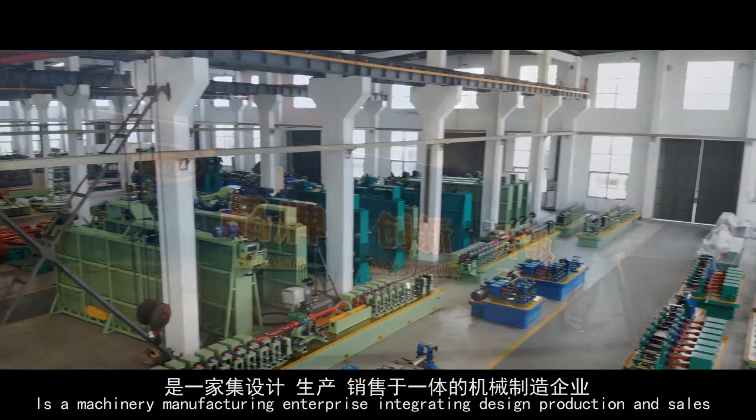Jiangsu Nanyang Machinery Manufacturing Company Limited, founded in 1971, is a machinery manufacturing enterprise integrating design, production, and sales. The company has been committed to the development and research of high-frequency welded pipe machine, stainless steel precision welded pipe machine, high-precision steel plastic, stainless steel composite welded pipe machine, and high-speed roller production lines of plastic profile. Nanyang has grown into a leading brand of precision welding equipment in China.

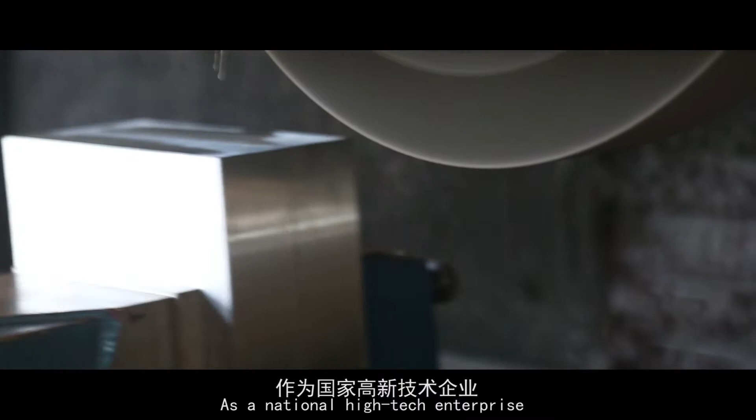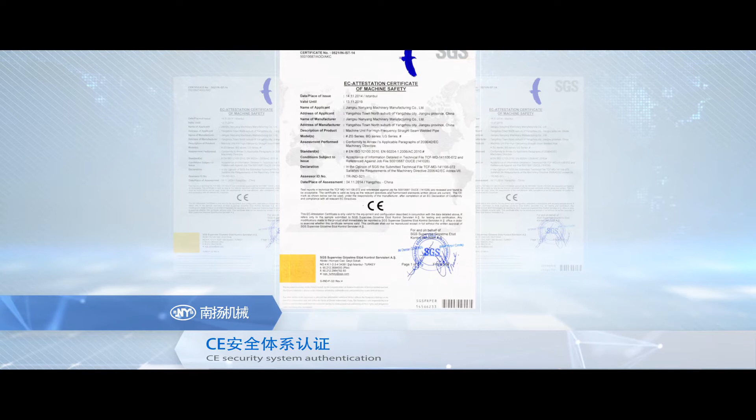As a national high-tech enterprise, the brand Nanyang has been appraised as a well-known trademark in Jiangsu province. The company has successfully passed the ISO 9001-2008 Quality System Certification and CE Safety System Certification, and has been appraised as AAA Contract Abiding and Trustworthy Enterprise and Quality Integrity AAA Enterprise for many years, and passed the National Measurement Management System certification.

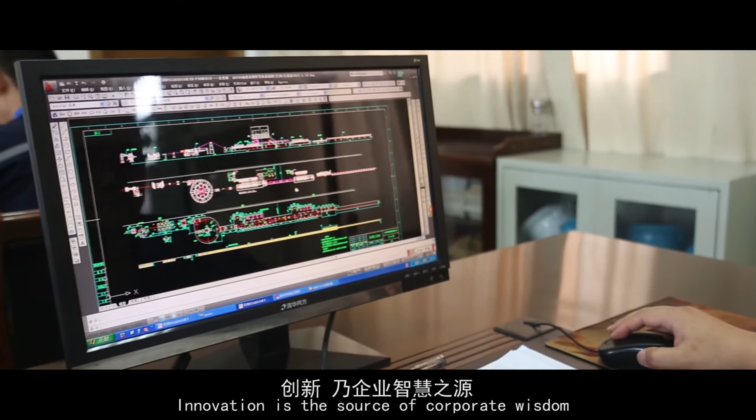This series of honors also reflects the remarkable journey of Nanyang people. Great wisdom, innovation. Innovation is the source of corporate wisdom. Nanyang has always been oriented by technological development and integrated innovative wisdom into the development of the enterprise.

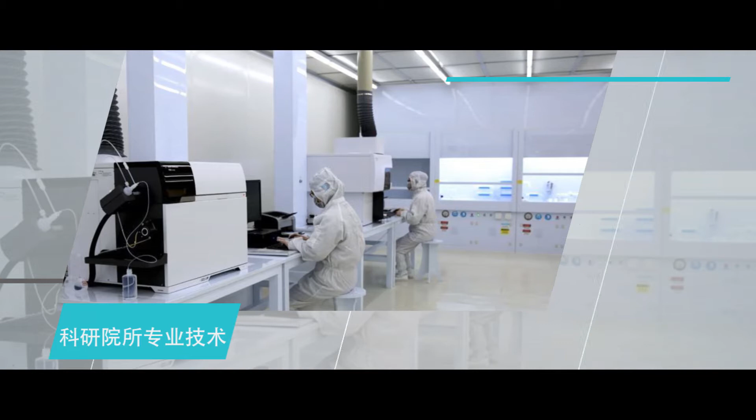In Nanyang, we not only have an expert team of high-level talents, but also have established the Precision CNC Roll Bending Forming Mechanical Engineering Technology Research Center of Jiangsu Province and the first-class Product Technology Design Center of China. We also have the professional technology platform support of many universities and research institutes in China, including Nanjing University of Science and Technology and Shenyang Ligong University.

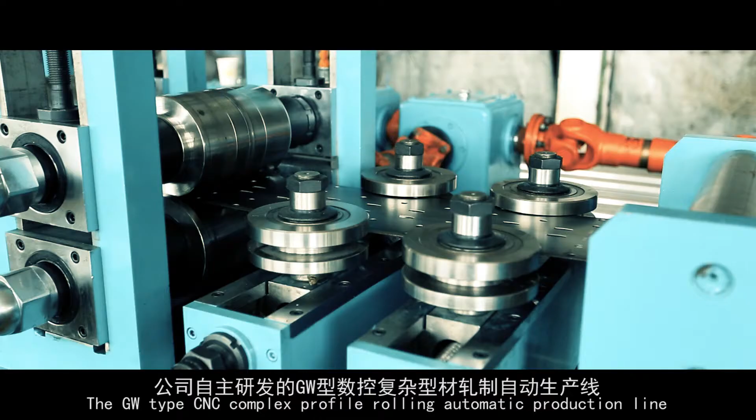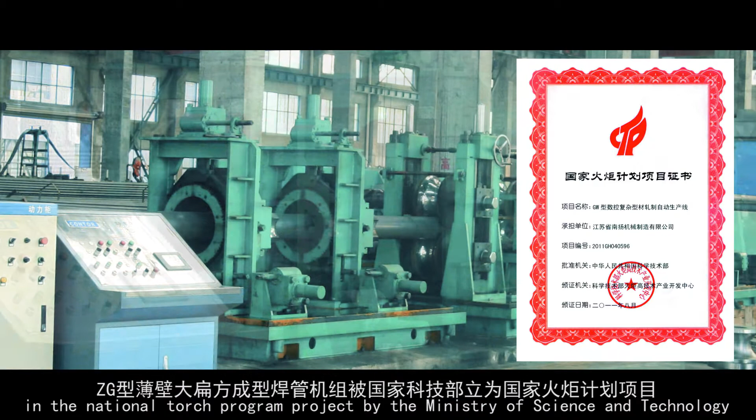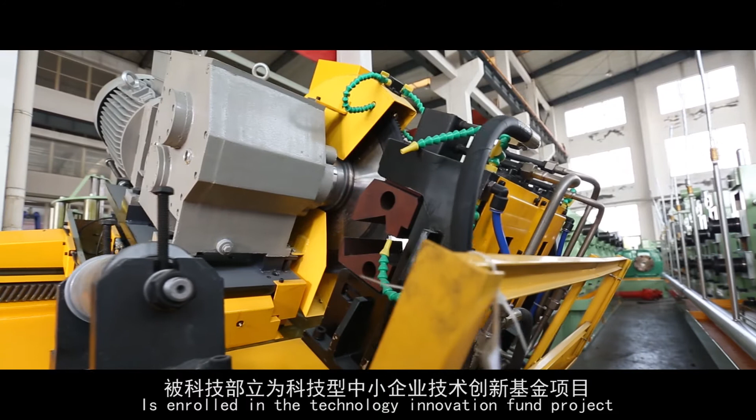The process of innovation is arduous, but the results are exciting. The GW type CNC complex profile rolling automatic production line and the ZG type thin wall rectangular welded pipe set, independently developed by the company, were enrolled in the National Torch Program project by the Ministry of Science and Technology, and the F20C NC Cold Cutting Flying Saw project is enrolled in the Technology Innovation Fund project by the Ministry of Science and Technology. Great responsibility.

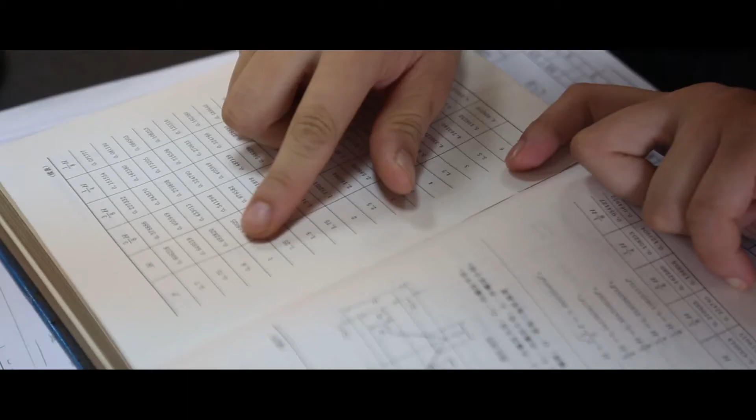Persistence on quality. Quality comes from the respect for details. Nanyang people inherit the craftsman's spirit of the big country and show the powerful production strength of the enterprise with the spirit of striving for perfection and the rigorous and pragmatic style.

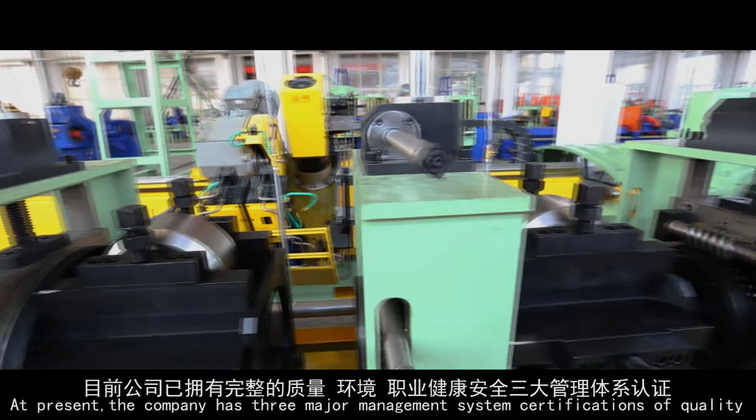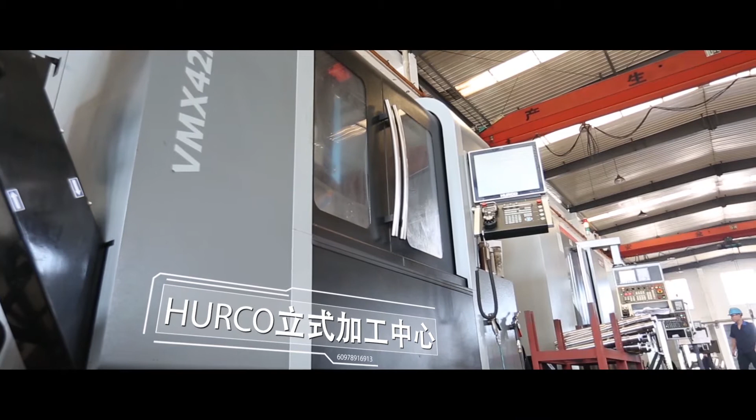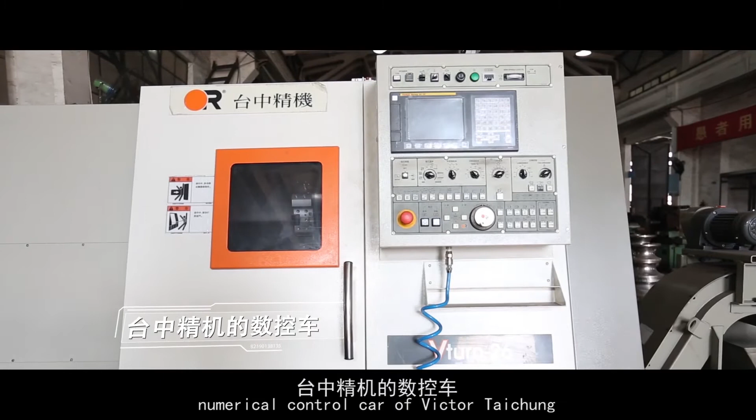At present, the company has 3 major management system certifications of quality, environment, and occupational health and safety, and has a large number of domestic and foreign advanced equipment and testing equipment such as HURCO Vertical Machining Center, Skoda Landing Boring and Milling Machine from Czech Republic, Large Gantry Machining Center of Taiwan Willy, Numerical Control Car of Victor Taichung, Trilinear Coordinates Measuring Instruments, etc., and achieves the annual output of more than 500 machines.

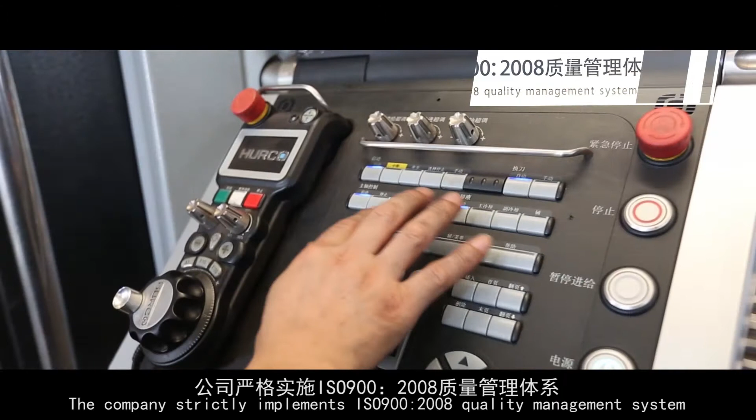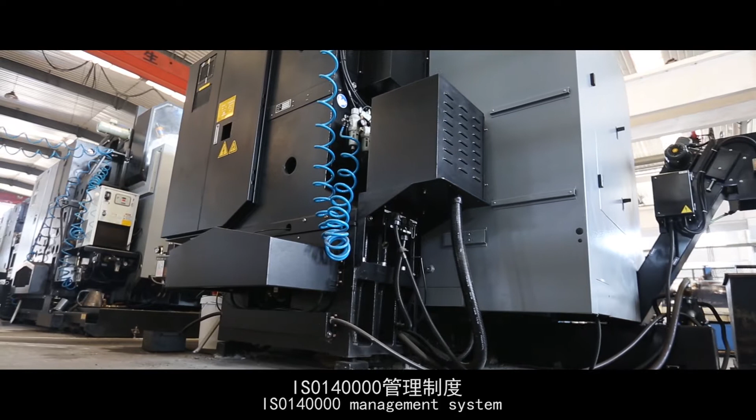Its perfect quality system, excellent and advanced equipment, and high-quality staff could greatly satisfy the customer's need. The company strictly implements ISO 9001-2008 Quality Management System, CE Safety System, and ISO 14000 Management System, establishes ERP Management Network and Scientific Operation Progress, all of which guarantees the optimization of product quality.

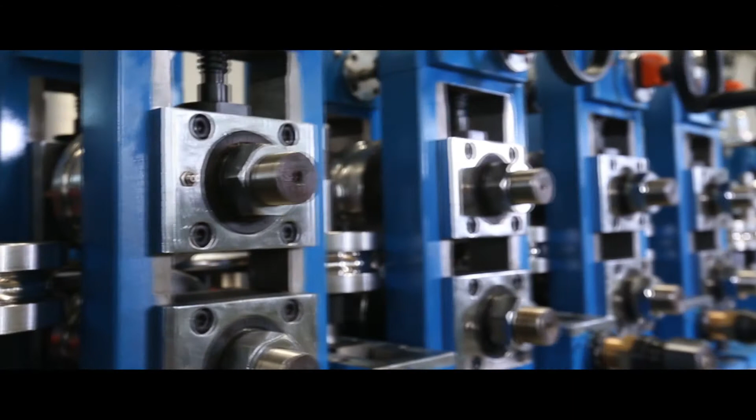Great confidence, reliance on perfection. Both the great creation in the changing age and the commitment to the heart during the development come from the tolerance attitude. Powerful progress, resolute mind, and unyielding spirit.

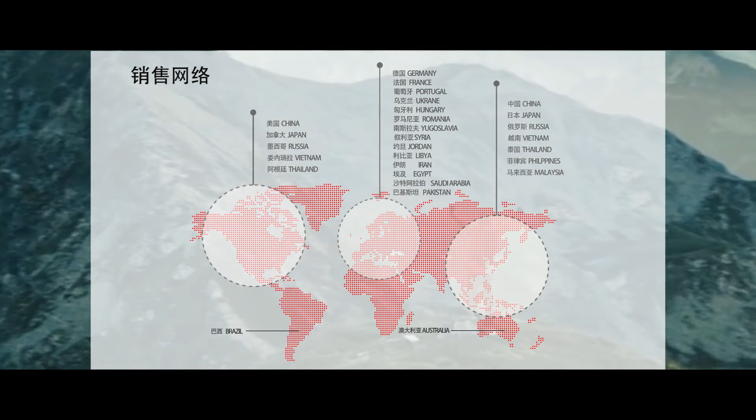50 years hard work and 50 years progress. The brilliant chapter takes inheritance and great leap. Nanyang is fully equipped with lofty sentiments and aspirations. The leading Nanyang people are progressing persistently toward the goal of building China's first brand of precision welding pipe equipment.

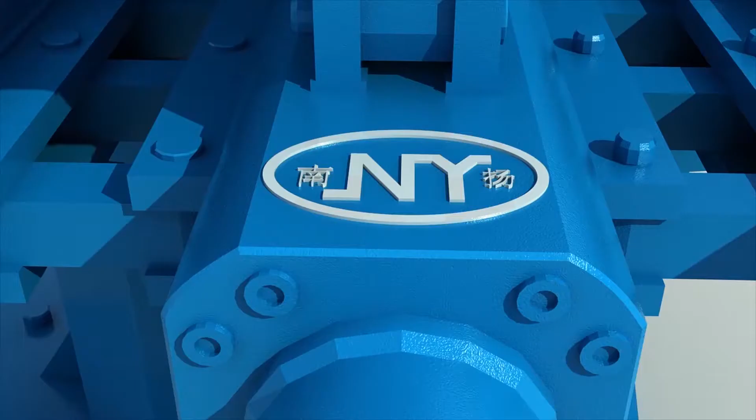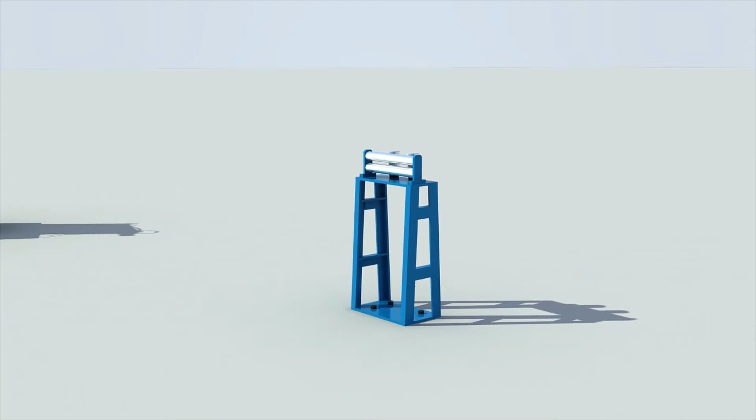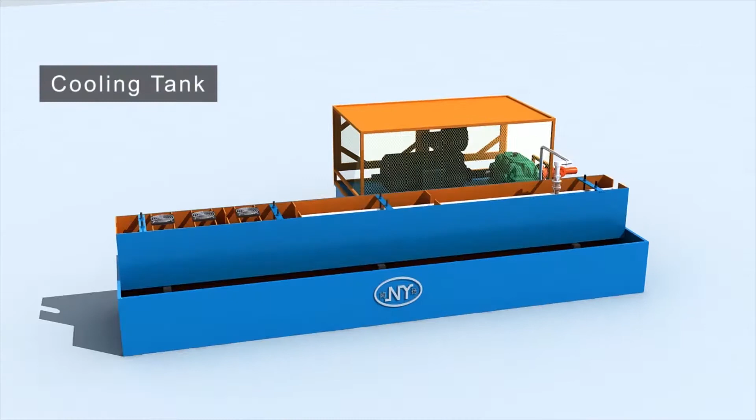ZG60 enlarged type high-strength steel high-precision welded tube mill line for automobile consists of double-side hydraulic uncoiling, shearing and butt welding, horizontal accumulator, forming and welding machine, cooling tank, sizing machine, cold cutting saw, run-out table and automatic packing.

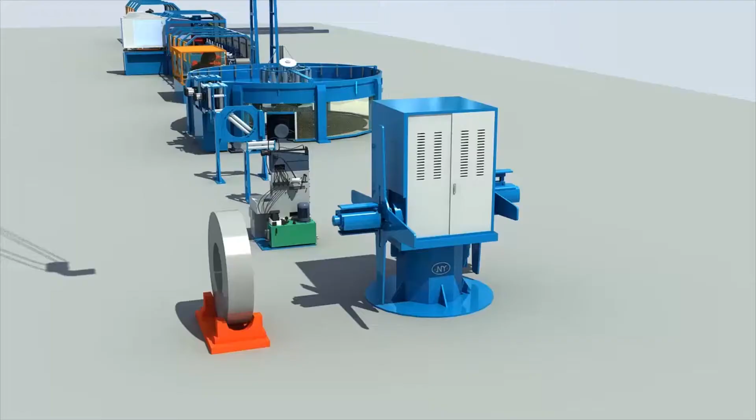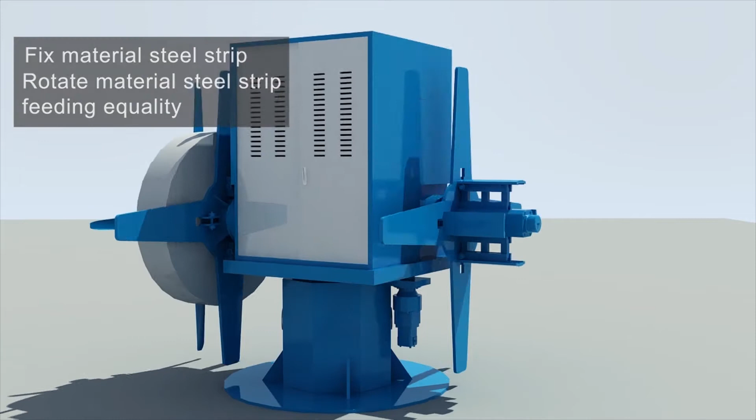Double-side hydraulic uncoiling is to lift the raw material strip by crane and hang it on the spare disc. The hydraulic oil cylinder pulls the strip back. The connecting rod expands the supporting plate outward to tighten the strip, then fixes the strip with a baffle outside the supporting plate. After using up the working side strip, the hydraulic motor drives the ring gear to rotate 180 degrees. The other side strip rotates to the working side for the next continuous work. All the above operations can be finished by remote control. When rotated in place, the cylinder lifts and falls to locate.

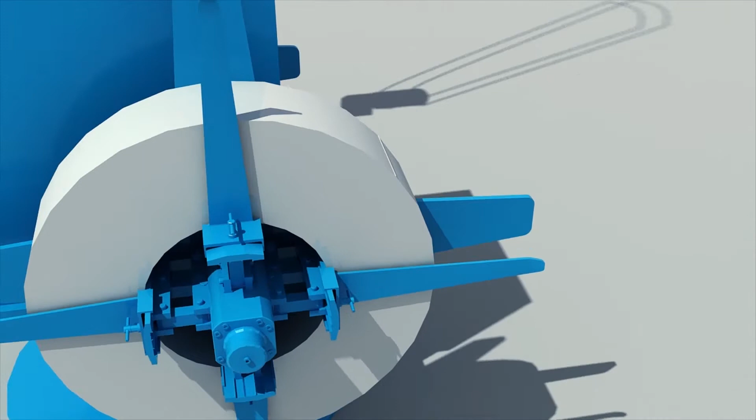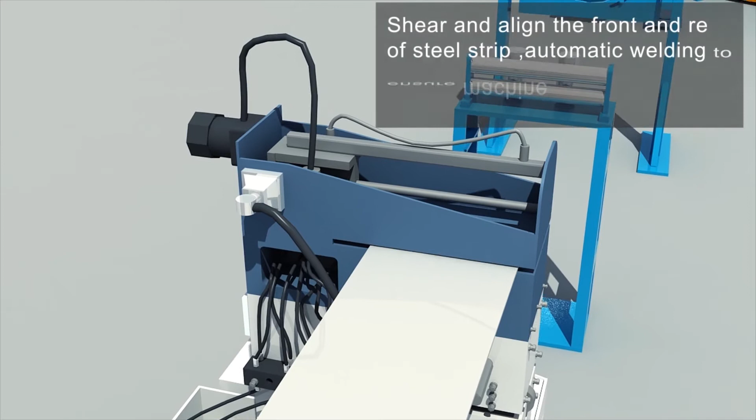The main function of the shearing and butt welding machine is to shear the front and rear of the steel strip. After the alignment, welding is done with an automatic argon arc welding machine and it enters the next process. The device can be moved forward and backward by the cylinder without affecting the pass of the steel strip when not working.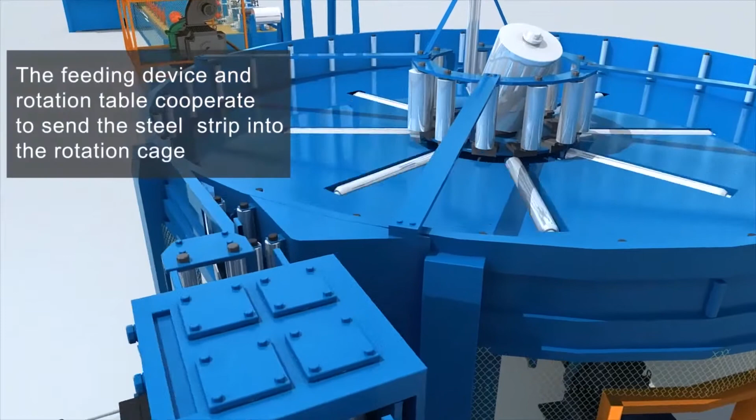The horizontal accumulator carries the steel strip through the feeding device, storing a certain amount of steel strip in the rotation table. The feeding device and rotation table cooperate to send the steel strip into the rotation cage and stop feeding when it reaches a certain circle. In this process, the steel strip will change from horizontality to verticality by the mobile rack. Then the main motor provides power to pull out the steel strip via the outputting device. The steel strip will return to horizontality.

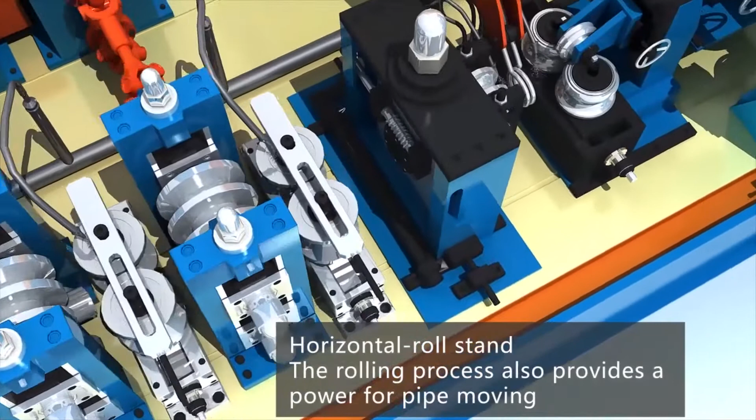The forming machine is used to turn the flat steel strip into the shape of a round tube by horizontal roll stands and vertical roll stands. The guiding device is used to adjust the position of the welding seam before welding, and has the functions of up and down, front and back, and rotate three-dimensional adjustment.

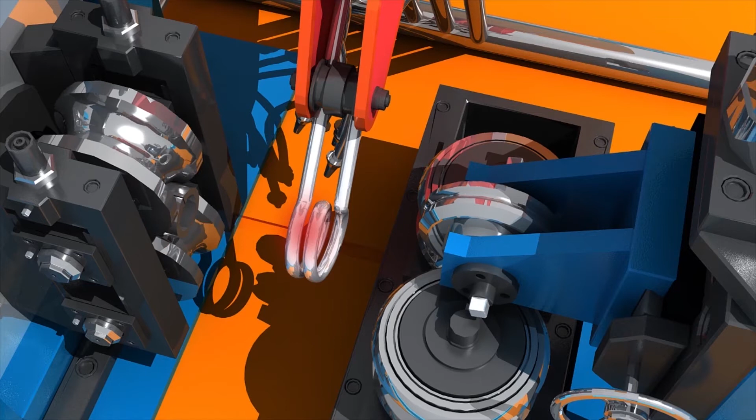Then the high-frequency induction welding machine heats the open area to melt it. The extrude device connects the open area. Afterwards, the scraper device removes burrs off the welding seam. This roughly formed pipe can go on to the next step smoothly.

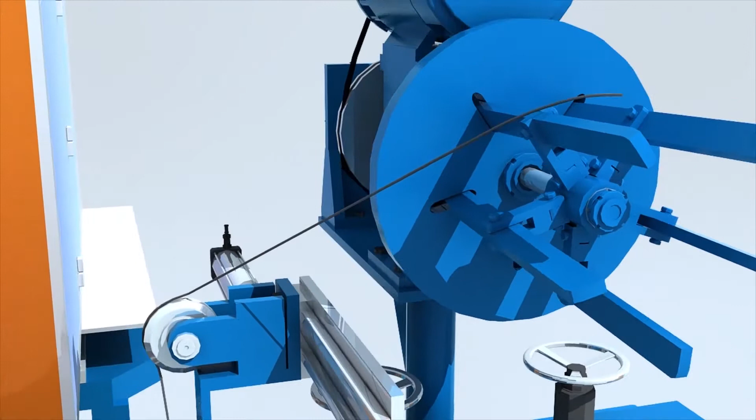The waste filament winding device is used to collect the waste filaments by planer. The device can expand to collect the planed waste filaments, then shrink to take out the waste quickly.

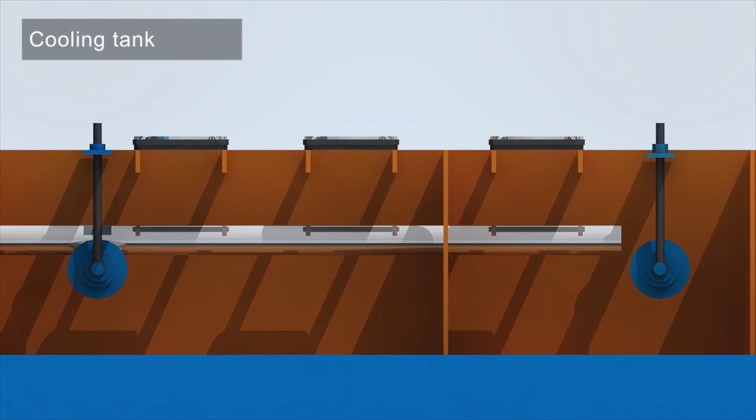The cooling tank is used to cool the welded pipe blank to the same temperature as the base material, so that the finished tube will not deform after being placed for a long time.

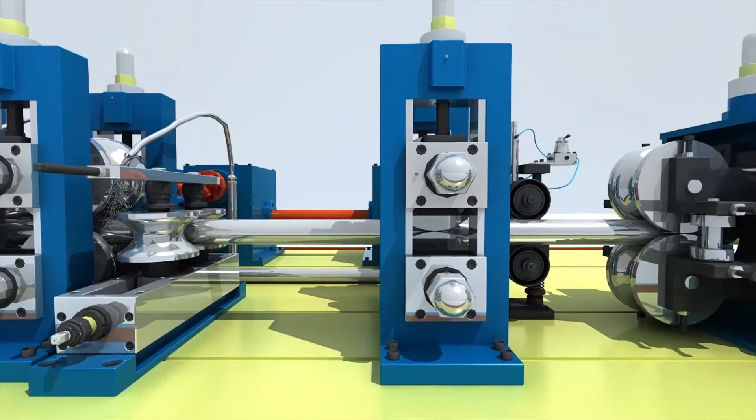The sizing machine is used to shape the welding tube after rough forming, to achieve an ideal geometric size. It can change a round pipe to square or rectangle by means of changing molds. The tail section is installed with 2 sets of straightening devices for online straightening.

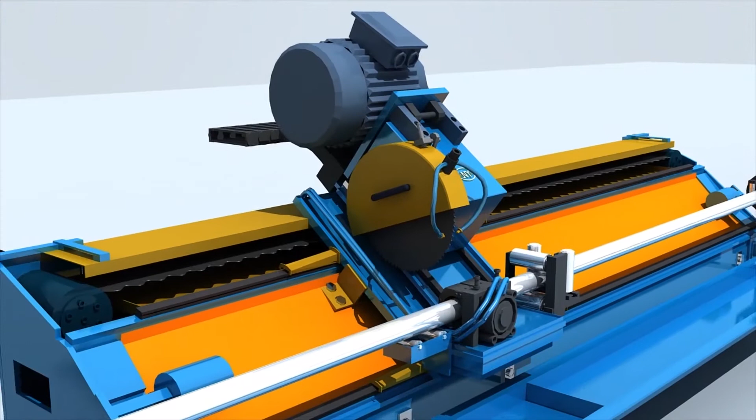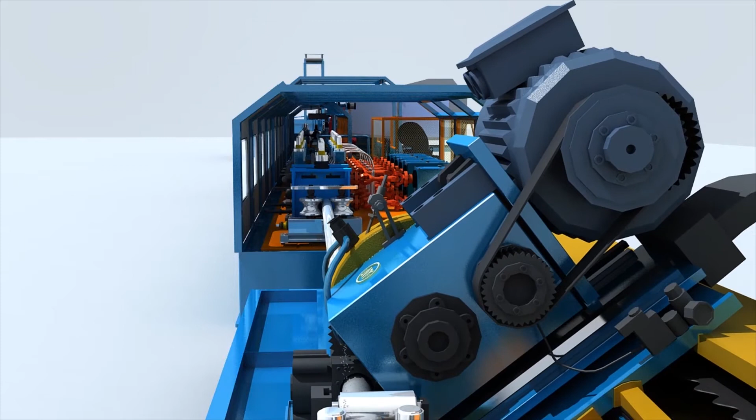The cold cutting saw tracks online and clamps to cut the pipe to a fixed length. It tracks with a servo motor, feeding back the speed to the motion control center with a speed measuring device. The motion controller performs a series of actions like acceleration tracking, synchronous motion, hydraulic clamping, cutting feeding, cutting return, and car return, etc. Car movement and cutting feed are controlled by servo motor.

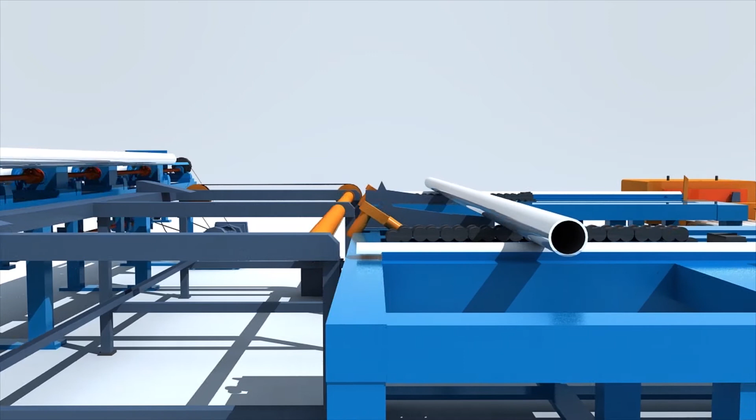The run-out table separates the cut tubes into different material frames according to quality. It drives with an AC motor, adjusts speed with a converter, and allocates using an AC motor and reducer. It distinguishes qualified pipe in cooperation with the cold cutting saw and online testing equipment.

The auto packing machine transfers the qualified tube by power chain, then counts and analyzes to put a certain quantity of tube into the material frame layer by layer. After that, a cylinder moves to put the tubes together for a worker to bind and tighten. The chain conveyor device moves the whole bulk of tube out of the material frame. The crane will finally transfer it to the area for finished pipe storage.

National High-Tech Enterprise, Jiangsu Nanyang Machinery Manufacturing Company Limited, professional in R&D and production of profile production lines and weld pipe roll forming machines, specializes in designing and manufacturing various types of HF welded pipeline, stainless steel precision welded pipeline, high precision steel-plastic and stainless steel composite welded pipeline, and complex shaped cold roll forming machines.

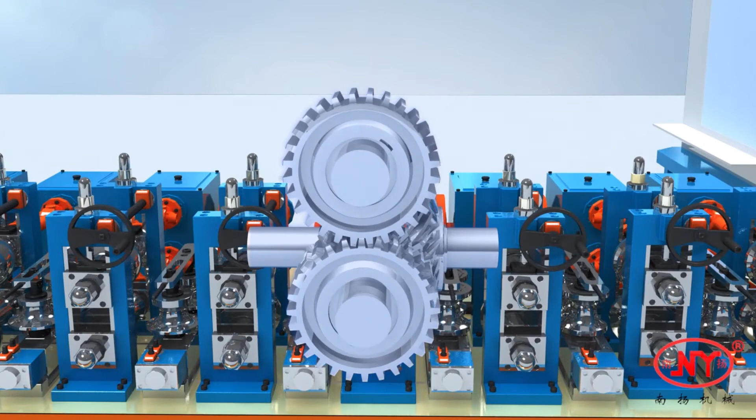The company has its own technology R&D team, large-scale high-end processing equipment, automatic CNC machining equipment, and modernized testing equipment, showing great advantages in equipment design, manufacturing, and quality testing, in all aspects.

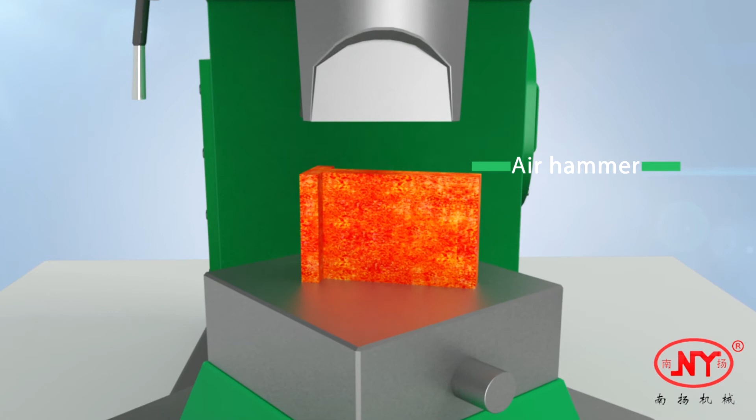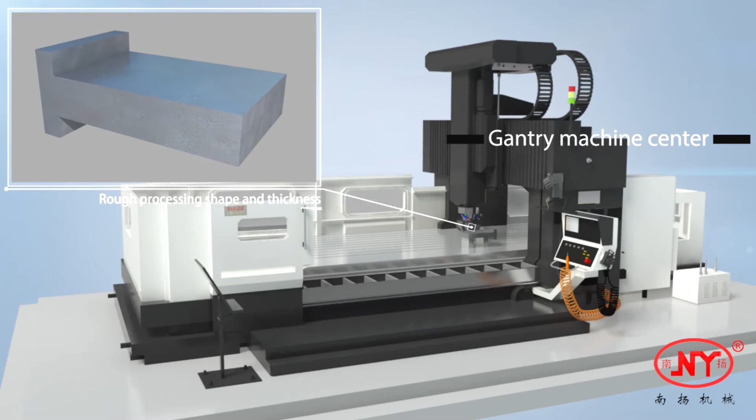Horizontal roll stand processing. Firstly, the billet steel will be forged and normalized. Then it turns to the milling machine to roughly process the shape and thickness. Secondly, use a large surface grinding machine to grind the base surface.

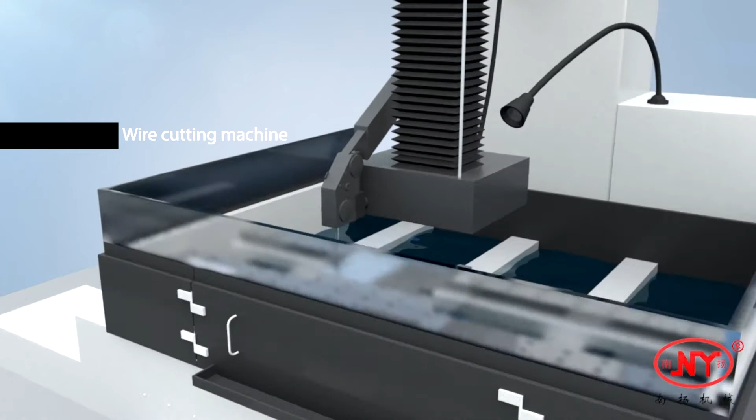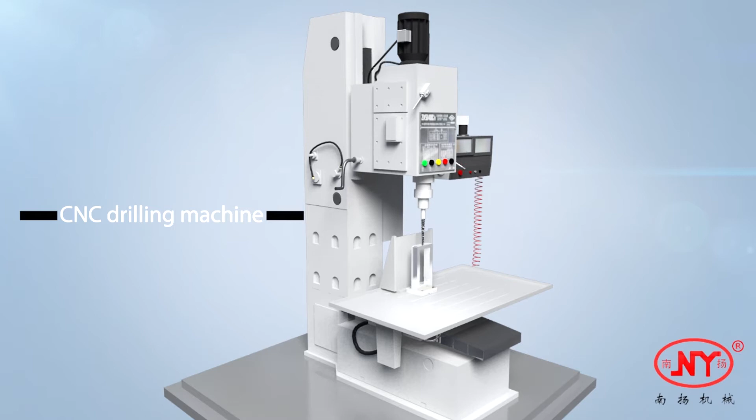Thirdly, use a middle wire cutting machine to rough cut and fine cut the square groove to size. Fourthly, use a gantry machining center to finish the thickness, upper and lower sides, and the bottom location slot. Finally, use a CNC drilling machine to process the fixed hole.

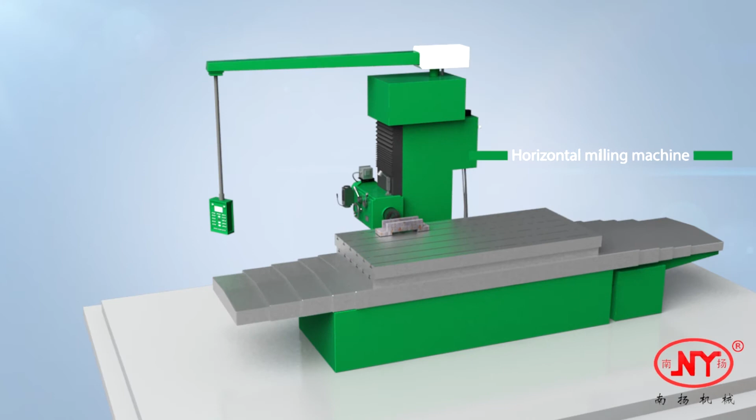Vertical roll stand processing. First, use a horizontal milling machine to rough process each part of the billet steel. Then use a vertical machining center to finish processing the upside and the sliding chute. Finally, use a CNC drilling machine to finish the threaded hole and location hole.

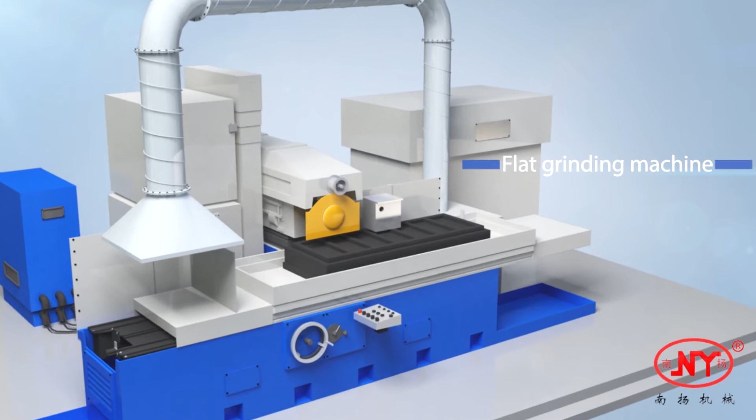Gearbox processing. After welding the steel sheet, the blank is annealed in an annealing furnace. First, use the end surface milling machine to process the shape. Then use the flat grinding machine to grind the down-base surface. Third, use a CNC boring machine to process the hole and mill the end surface. Finally, use a CNC drilling machine to process the fixed hole.

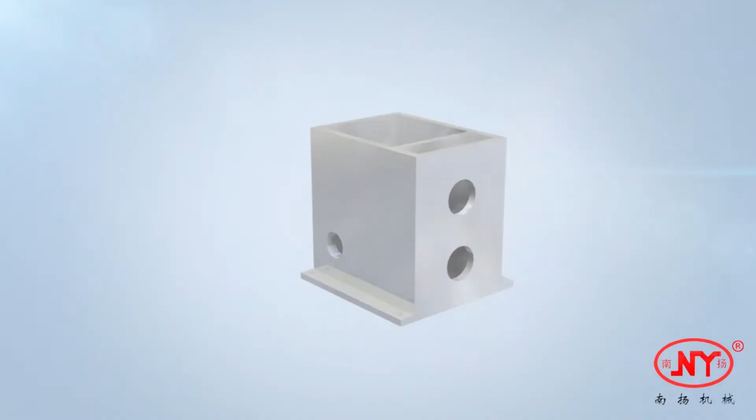Main machine body processing. First, the sheet material is cut to size by a plasma automatic cutter, then welded by a carbon dioxide gas shielded welder. A mechanical hand welds the side water groove automatically. Then it is annealed in the annealing furnace.

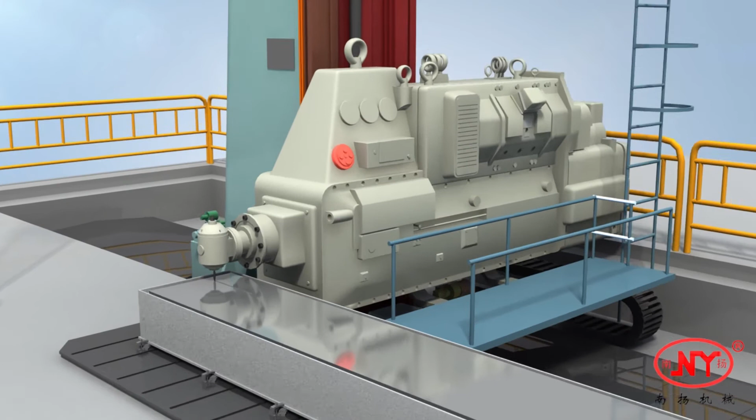Use a shot blasting machine to clean the sand. Finally, use the ground boring and milling machine for rough milling and finish milling the upside, milling the two-side location groove, point welding, drilling holes, and tapping for the fixed holes of the horizontal stands, vertical stands, and the gearbox. After processing, the flatness reaches 0.05 millimeters.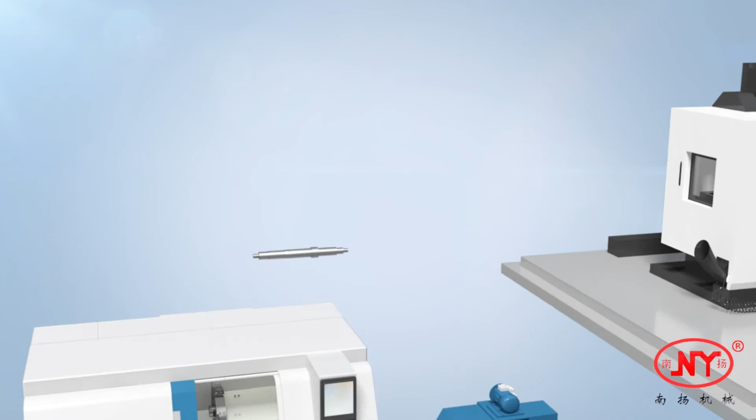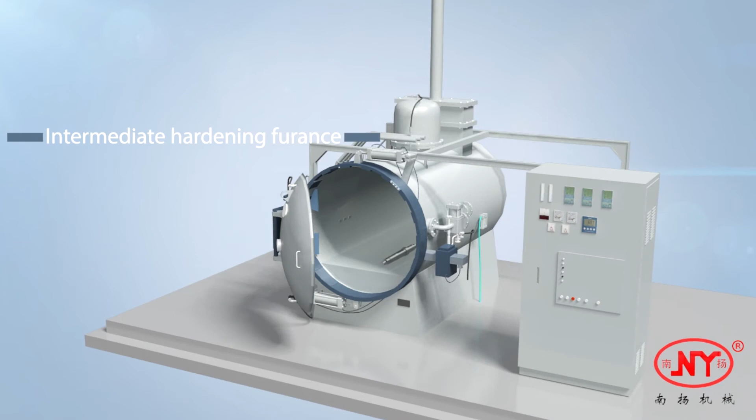Horizontal roll shaft processing. First, use an intermediate hardening furnace for the bar stock to go through quenching and tempering. Then use a CNC lathe machine to semi-finish each part's size. Use a vertical machining center to process the key groove. Then high-frequency quenching, followed by grinding on a grinding machine to grind the circle.

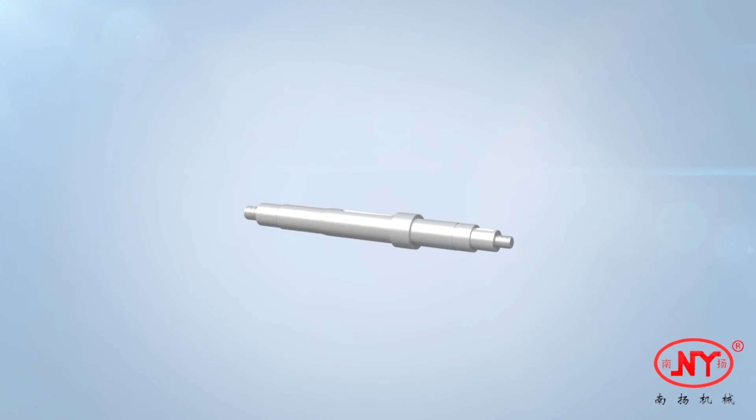Roller processing. The blank will turn to the normalizing furnace after forging.

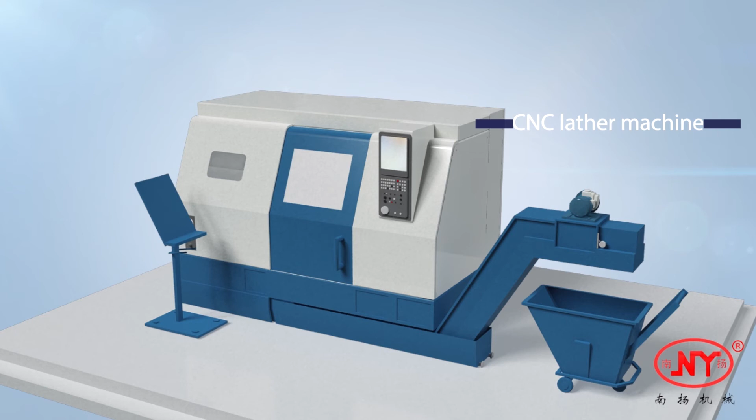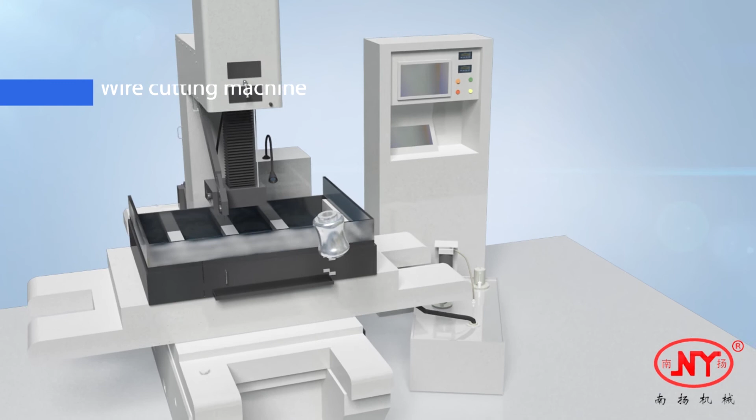Second, the CNC lathe machine will roughly process the mold's cavity and turn to a vacuum furnace for quenching treatment. Then use a CNC lathe machine to finish processing the internal hole, end surface, and the mold's cavity. Finally, process the key groove by wire cutting machine, and stamp different marks on the surface of the roller.

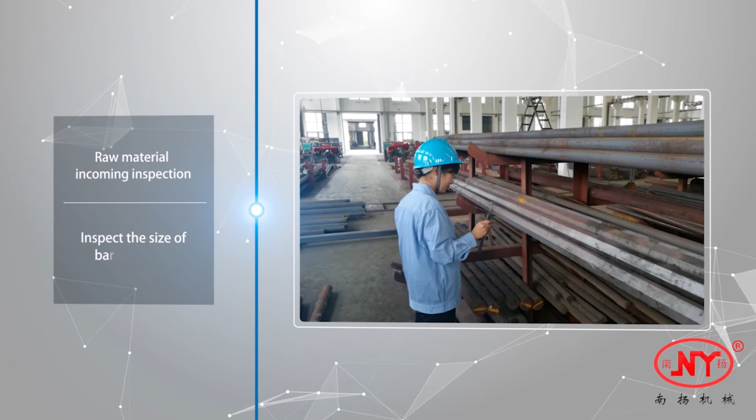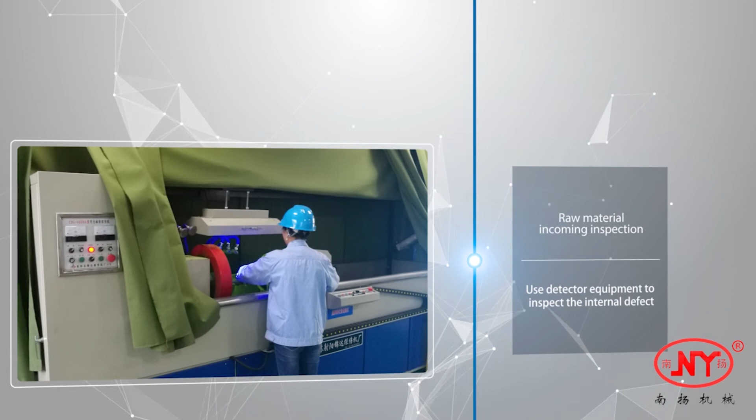Raw material incoming inspection. First, inspect the size of the bar and sheet. Then use detector equipment to inspect internal defects. Finally, use physical and chemical analysis to test the material composition.

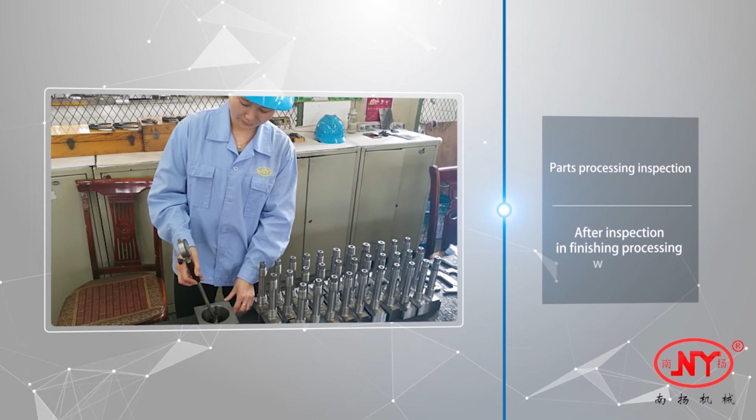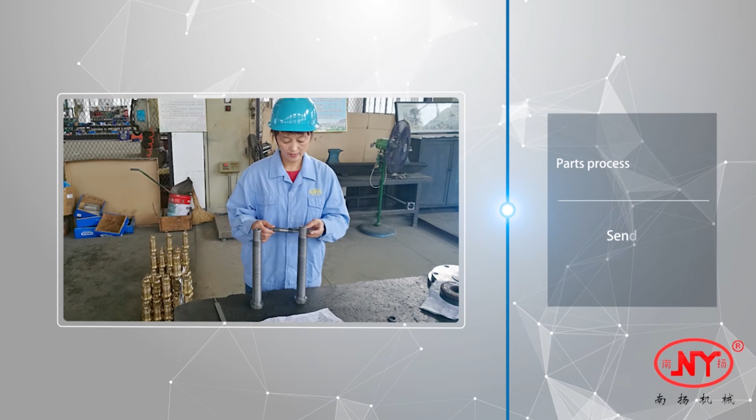Parts processing inspection. After inspection in the finishing processing workshop, spot check the finished products from the machine. Send them to the general inspection room for a second inspection. Finally, use a three-dimensional coordinate detector to inspect the key parts.

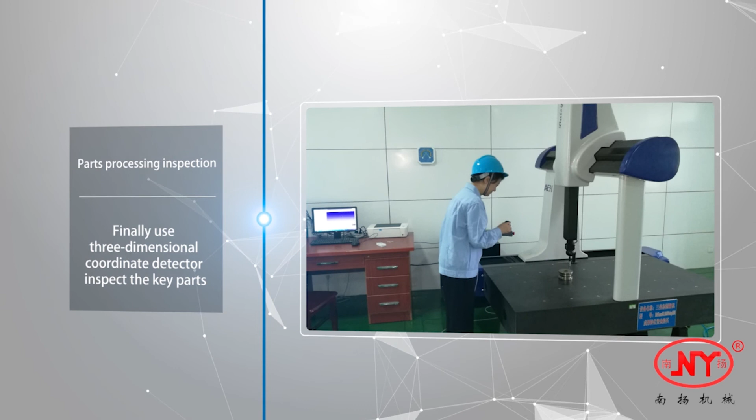Assembly process and outgoing inspection. After parts assembly inspection, the machine is sent to general assembly for the finished product inspection before delivery.